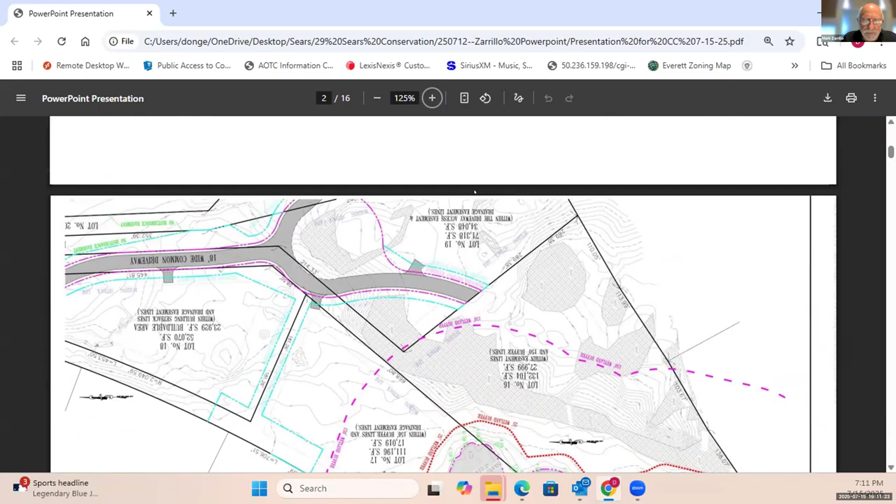You could switch the slide, please. Okay, lift it up a little bit, Don, to the top. I need to see the bottom of the slide. That's it. Okay, so I changed the orientation so I could show you the entirety of the wetland area on the backside of the property. This flipped 180 degrees. Sears Road is to the upper left of the screen, and our property is outlined by this large rectangle, down at the center of the screen going to the bottom. The wetland is outlined by a purple line, which was created for the ANR of the original development. This is not what EcoTec has done, because they have done another more recent wetland delineation based on the new survey.

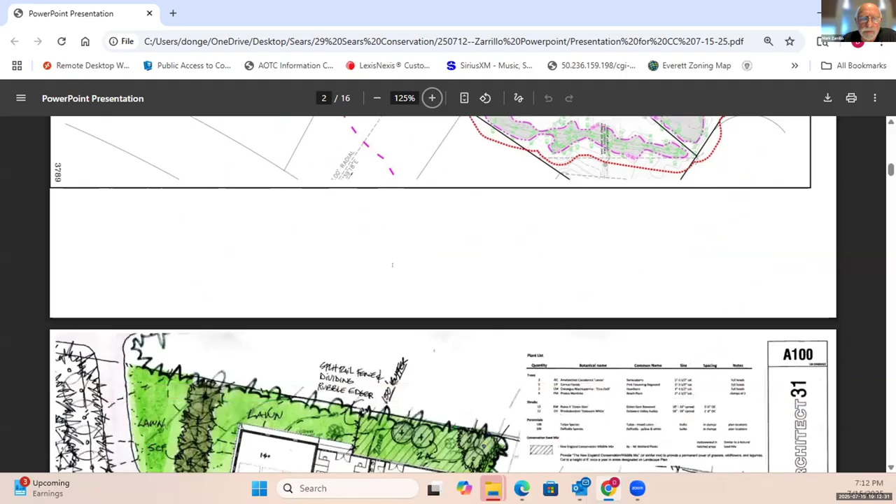So this is the property, originally called Lot 17. You could change the... so originally on Lot 17, the proposal that was presented in 2023 — if you notice, Lot 17 has 111,000 some odd square feet of area, which is an incredible amount, allowing for an incredible amount of FAR. So the original plan was to build a house with a swimming pool and a sports court, essentially to satisfy the family already living at 21 Sears Road who thought they needed a larger house.

Next slide, please. So during discussion of this larger house and what it would wind up looking like, the question arose: what can we do to add on to 21 Sears Road, the property immediately to the left of this site? The answer was there's not enough FAR left for number 21 Sears Road. So what we did was borrow some FAR from Lot 17, which you see here, and reduced the house and the size of the development there to include a house smaller than the original, but without a sports court and without a pool.

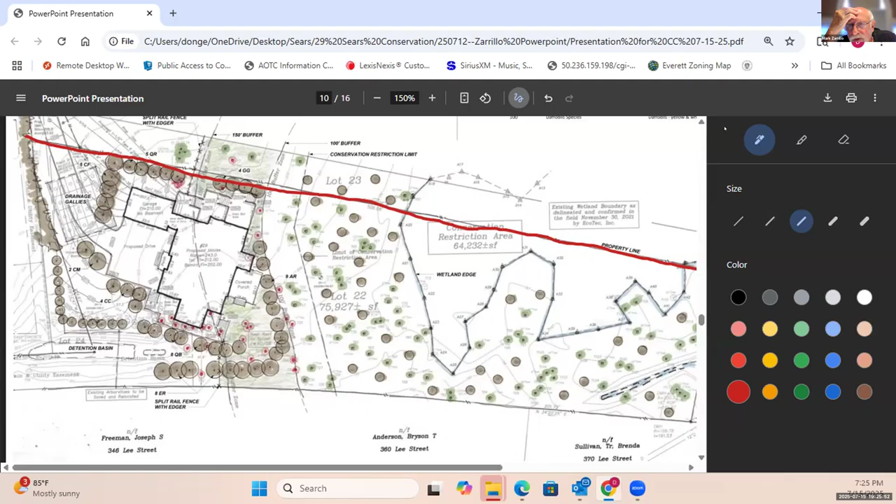But Don, if you would, for just a moment, take your cursor and outline the property line across the top and then down the middle for them. Yeah, so the property line now goes all the way down to, keep going if you can. This is a little tricky, but I'm doing my best. Yeah, well you're doing better than me. I couldn't get it to work. Right there. Yeah, and then you got some sort of table showing there on the corner. Can you get rid of that? That's me drawing. Oh, that's you drawing? Okay, testing my computer skills. Okay, what I really want to show is the end line. Yeah, yeah, there you go. That the end line right down there.

So these 35 trees are confined in lot 23, which is the old lot 17, as described by Don. But as Don had mentioned previously, we had suggested that the conservation restriction area would be the whole backside of this lot. Since the client owns both lots, he would certainly like to go ahead with having the whole area, which was originally a whole piece, put in the conservation restriction, including the lower portion, which is the new lot 22, and the other lot as well, connected to number 21.

Don, could you go to the next slide, please?

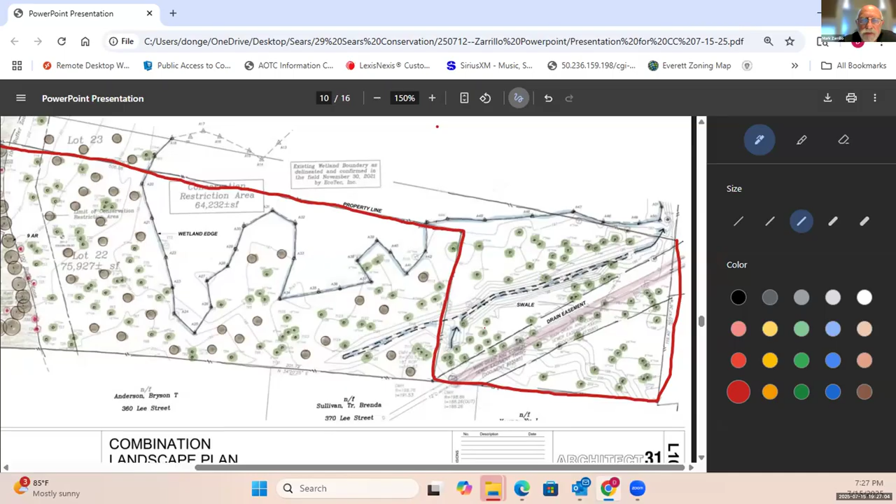Okay, so then you can get, there you go.

So this is the new plan that Vern put together that shows the conservation restriction line and also shows the designation and area of lot 75,000 square feet, which includes all of the backside of that property in the conservation restriction area.

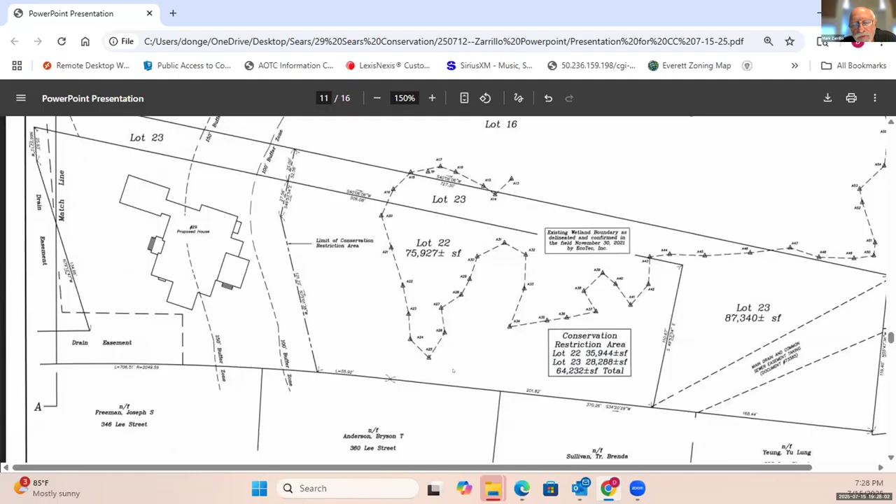Oh wait a minute, there's a box there. If you can read it, it says lot 22 is 35,944 and lot 23 is 28,288, for a total of 64,232 square feet, which would encompass all of the backside of that property. Great, okay, next slide please.

So this is - well, you can make it a little bit bigger - this is a larger area to show you the difference in the colors, the distribution of the trees, the organization of what the edge of the wetland looks like, and also what is going on the site.

Could you roll that up so we see the bottom of that plan? That's yeah, yes, okay, right.

So we've had a lot of comments by abutters, and one of the things we could address is that 360 and 370 Lee Street - they're really concerned about drainage, and rightly so, because their properties are in the 100-foot buffer. Mostly all their property is in the 100-foot buffer. So their property drains out onto our property, which is not supposed to happen, and it goes out that swale on the right side, and I'll show you the continuation of that, but that swale goes out to Dale Street and continues on and basically goes into, I think, the pond over there at Larz Anderson, as an intermediate area.

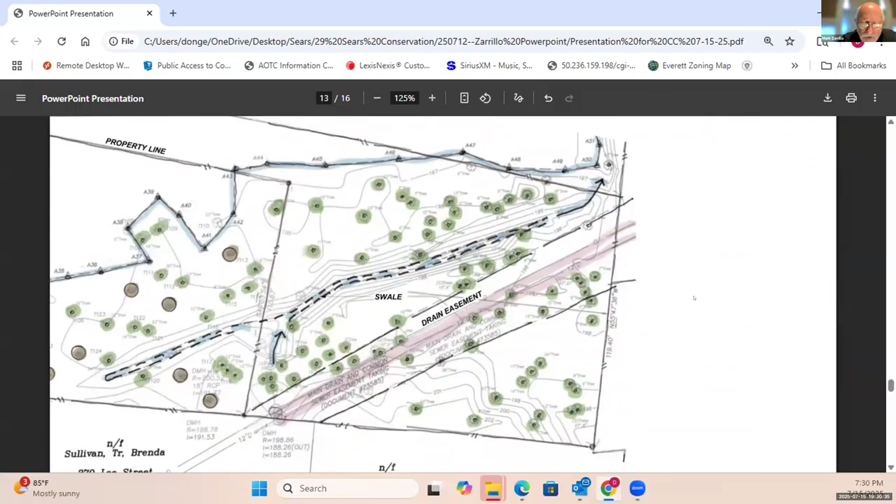Let's look at the next slide please. Okay, so there was real concern about that back parcel, and why this was done and how it was done. As I mentioned before, the real reason was to add square footage to number 21.

So you can see here that there's a swale that continues down and right out to Dale Street, which is on the right-hand side. And also there's a drain easement by the town, both for sanitary sewer and stormwater sewer.

So the fact is that there's really no way that you could develop this back parcel because of the easement, because of the drains in place, and because the town wants to maintain that open drainage from the abutters at 360 and 370 into that swale and out, so that they don't have to put an interceptor in there to deal with that. So essentially, this is undevelopable, and I hope you can realize by looking at it that that's the case.

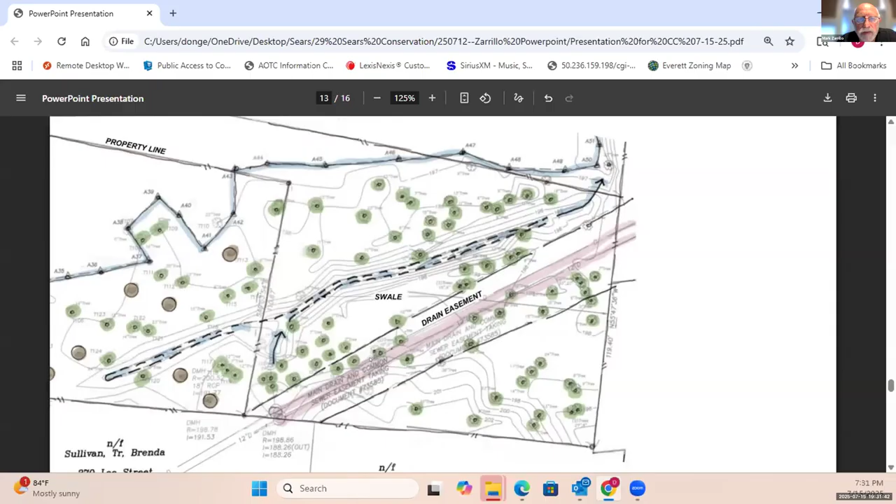Next slide please. Okay, so this is the total package. We've already sort of touched on drainage a little bit, but if we go back to the original site for number 29...

You can see that under the driveway are the drainage galleys for the property, which have been organized by a civil engineer for all the drainage that comes off the roof, all the drainage that comes off the paved area in front, and essentially goes into those galleys.

And then if you look down at the bottom of the screen on the left-hand side, you can see a drainage basin. That detention basin is the detention area that was originally organized.

And I believe that when you folks approved - I think it was number 25 - for construction, one of the conditions was to clean out the drainage on this site, all the catch basins, all of the swales, make sure that the drainage worked, and so forth. And that was done, I think, 2 years ago. Vern can attest to when that was done.

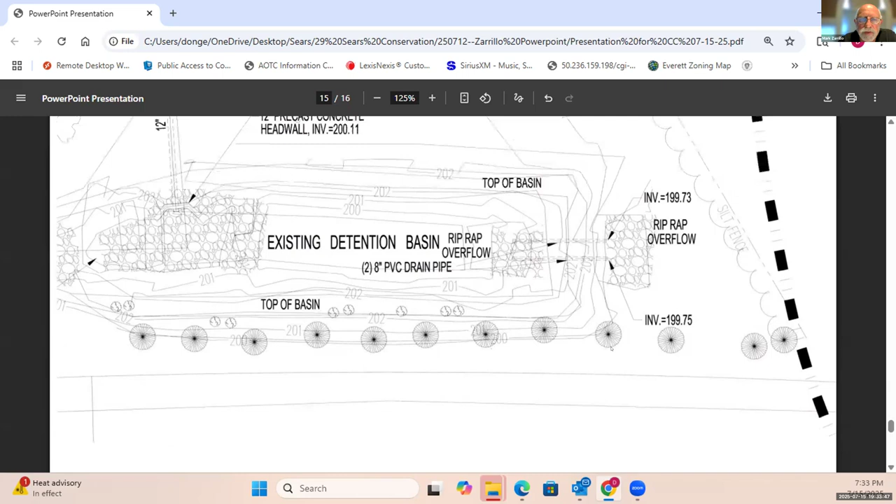Okay, so I think we covered everything that you were looking for, at least initially. Number one, why the subdivision occurred, how the subdivision occurred, what the subdivision was for, and how it affects the property that is up for approval now. We looked at the rear part of the lot to understand why that can't be developed, and what the real reasons were, which was to just add FAR capacity to 29 Sears Road.

We looked at the planting and the mitigation that not only occurs on site and in the 150-foot buffer, but also in the 100-foot buffer, and for the most part across the entire property, which would be in conservation restriction. And then lastly, looked at the drainage to ensure that we are basically containing our drainage and organizing our own work there. So that's about it, and I hope that the context gave you a little more insight as to what type of work has been going on and how it can be fruitful in the future for everything, including the wetland. Thank you.

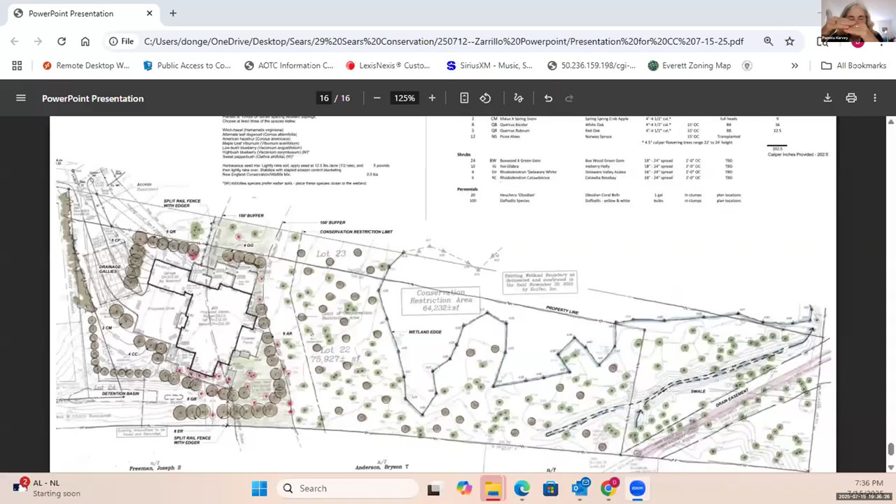I wondered if you could just go back through the slides, maybe a dozen slides back, just to be sure I'm clear in my own mind where it went from the project that was approved in 2023, and then the new work going forward. Was the swimming pool part of the 2023 plan? Yes, it was.

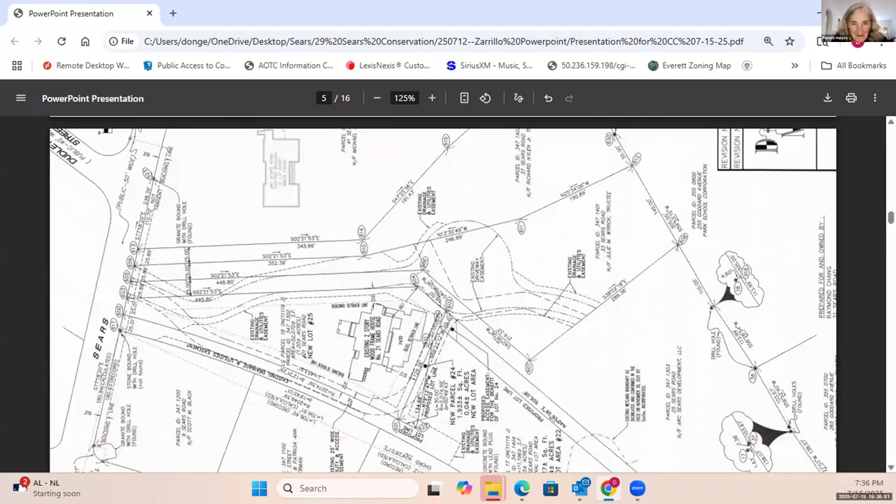So why don't you go back? So this is, yes, okay, so this is the one. Why don't you flip back one more? I think you're going forward. Oh, I'm sorry, is this the one you were looking for? Yes. Okay, so this is the 2023 one where it shows the swimming pool and everything. Yes, and it was all undercover, correct? It was all structured, yeah.

Okay, so for purposes of the amendment, it's just important to know what it is we're amending. So this was the project plan in the original order of conditions, showing the additional swimming pool area, the bump out there, and okay, and then move down one to the one we're looking at now, where the house was reconfigured. Right, and you can also see the New England wildlife mix zone indicated by a hatch in the darker green area, and the fence and so forth, so that's repeated in the new plan.

Okay, so why don't you just go forward one and we can look at the next. Yeah, so you can see here, it does knock off quite a bit of the footprint of the building.

Okay, Roberta, what were you gonna ask? Roberta, you're next. I think you're right to acknowledge that this is somewhat confusing, and for us this will be the first time we're looking at a situation that involves the tree protection bylaw and part of the buffer zone. And I guess I would just note at the outset that we are interested in the input from that process, but we do have our own standards that we're required to meet.

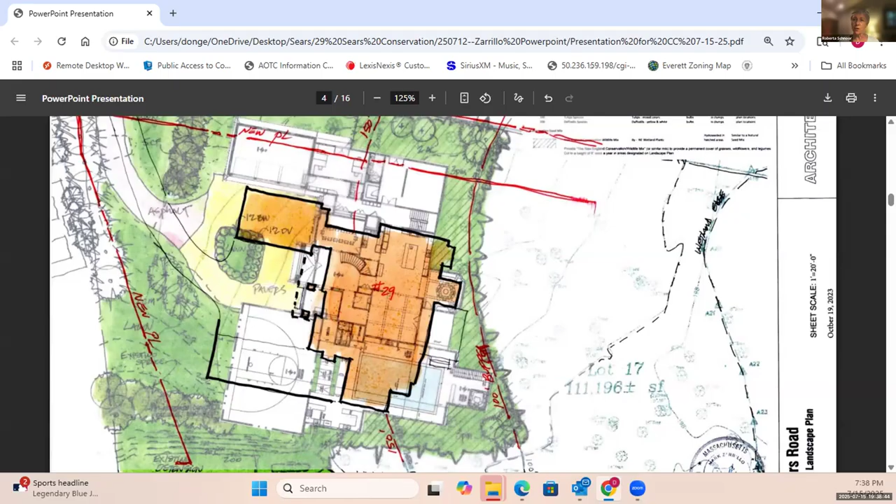And I'm curious, first of all, as to whether you've been through the permit process for the tree protection bylaw. I have, yes. And so has this plan been through it? No, this particular plan, the application has been made, and we're perfecting it as we speak. It's under review, I've received comments back. Comments were, at least up until now, not substantial in the sense that we need to change anything. One of the things we found is that there's sort of a glitch in the actual application process, because once you submit the information, you can't update it. So you have to put additional information in and indicate that it's been revised. I think that's going to work its way out soon.

And I think that in the beginning I didn't think it would work, because the balance I thought would have been off. But when you get the arborist involved and you figure out what trees are dead and what trees are unviable and that sort of thing, and then you subtract that, and then finally you come up with a number.

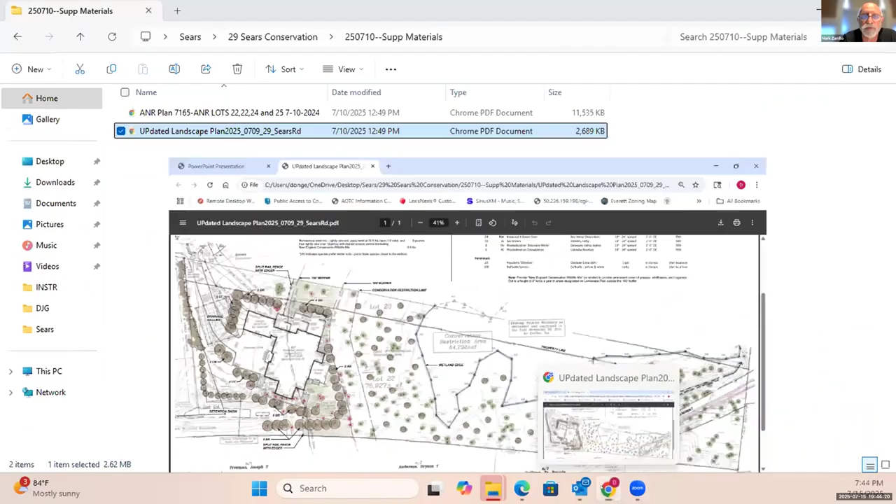Can we go back to the slide before this, please, about what you just said about removing things, particularly if they're in the buffer that look like that. Go back to the slide before. Can you go back to the slide before? Yeah, I'm working on it. Okay, keep going. Oh, I'm sorry, maybe it was forward. I'm sorry, it's the one with the red dots on it. Yeah, that one, that one. Okay.

So the trees that are down at the bottom, all along the edge there, those are actually, most of them are small caliper trees. The ones that are out in the open, there's 1, 2, 3, 4, 5 trees at the very bottom. Those are actually dead because there's too much water in that area. So what we're doing is, we're taking out 3 trees along the edge of the buffer, because those trees just are not in good shape.

They're really unviable. And then we are planting 9 trees that are natives along the edge of that buffer, plus the saplings that are going inside, much better condition eventually than it is right now.

You know, there's really just one tree that actually is a tree that you would consider to have shape to it, and that's the tree at the very top, which is actually on the adjacent property, so it's not even on our property.

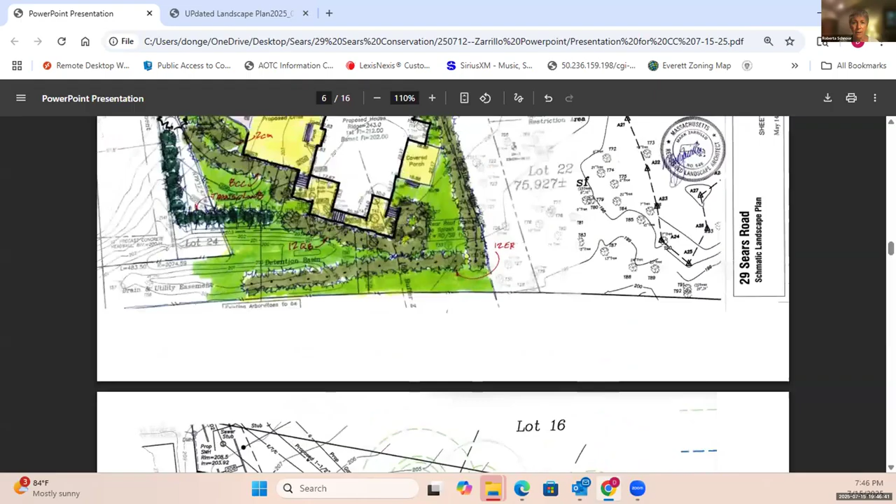So just generally, if you could go forward so that we can see the landscape that you're proposing, just on that map. Sorry, is it up one slide? Yeah, it's up. Up, let's see. Up. Yikes, you got to go up. I'm sorry, you got to go down in order to see it.

Yeah, I think that final landscape, the comprehensive landscape plan is what we're looking for. Okay, but go back to that chart for just a second, if you would.

If you look at this chart, this is the chart that was prepared by the arborist, and you can see that the condition of those trees are all poor. All the trees that are off-site, which are the first 9 trees on the right-hand side, off-site, last column, those trees are remaining. And then a little further down, there's a number of trees in the buffer, and if you look over, they're all remaining. So we are keeping all the trees we possibly can that are not invasive or unviable.

Except for those trees that we need to take down because you need to do that in order to build a house. I see there are lots of questions.

I just want to, if I could, focus on the landscape map, the complete map, and maybe other people will have questions there too, if we could get that up in front of us. Yeah, sure, so this is the final landscape plan.

Okay, so let me zoom in a little bit. So I just want to understand, because I know you have changed the shape of the house, and I see it looks like 2 staircases. I'm looking at the area within the 100 to 150-foot buffer zone that is outside the house now and to the west.

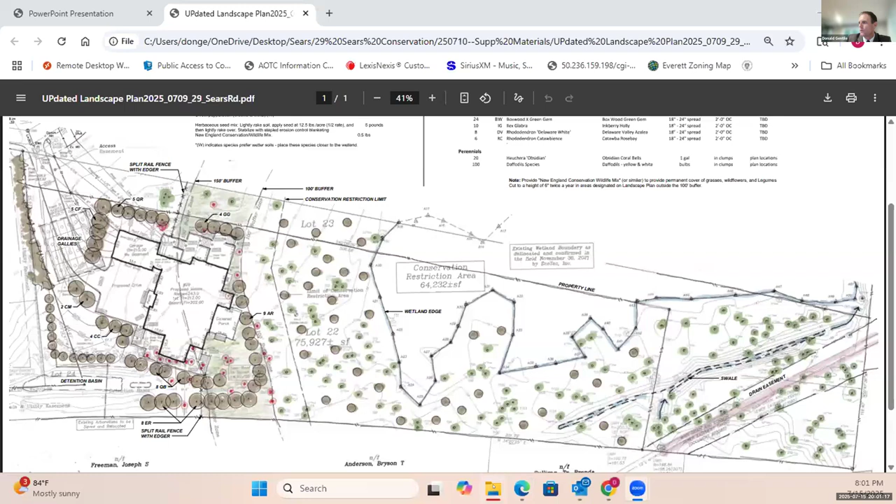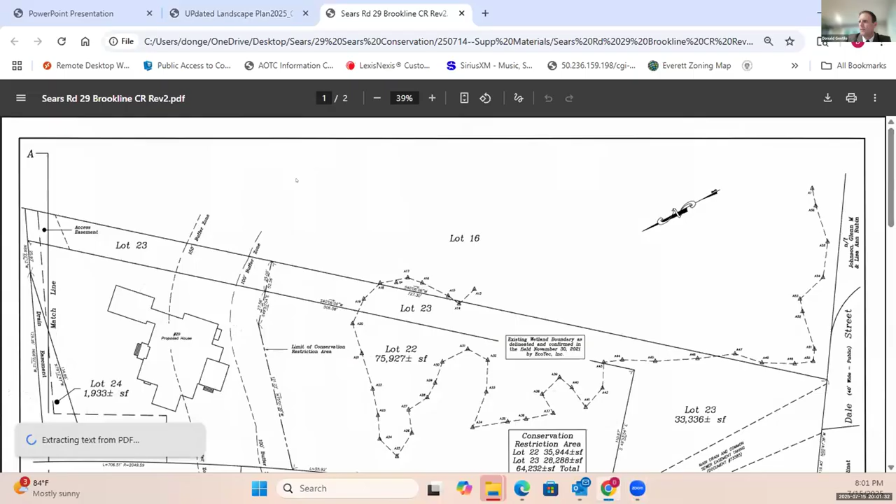I did not catch that difference, but I can certainly show you the latest conservation restriction slide. I believe the one in the presentation was one we had received previously, but then I received an updated one, and I just wanted to make sure that was the one of record. The presentation had lot 23 at 85,000 square feet or something like that, so I want to confirm this is the one of record. Yes, that's the one that's in the record online, the one we're looking at right now.

That's what I have from my end, and from an operational DPW point of view, this tricky business of the 100 to 150 foot zone, where everyone has jurisdiction, requires a lot of oversight. Looking at it from both the Conservation Commission point of view and the DPW tree preservation point of view, there are a lot of vectors and elements, and trying to find something that upholds the values of everyone and the onus of the various departments and commissions is a tricky business. It's something we're working on moving forward, and I appreciate the flexibility of the commission in reviewing this, and the applicant in addressing these new changes.

I would just say, Mr. Gentile, I really appreciate the organization and work that went into addressing the comments from last time. The systematic update was very helpful. Oh, thank you. I'll give a lot of that credit to Mr. Zarrillo, who came forward with the presentation.

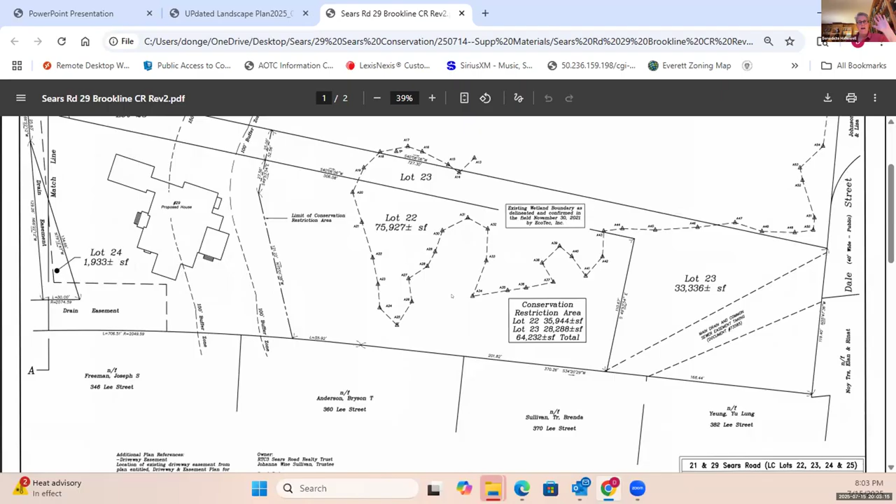Hi, thank you for your time. Benedicta Howell, town meeting member, longtime resident and neighbor. I've known three generations of that property, as I mentioned last time. Thank you all for being very organized and getting into the meat of the matter. I've been coming to all the meetings, and there are a lot of us on tonight, not always there, but we're all following this closely because we do care about this property.

While I make my comments, does anybody have a real live picture of the site? I ask because I think it would be great to look at the site for everybody to see what it really looks like. We're all talking about this and looking at plans, and I thought what a shame that one doesn't really see what it looks like. So my questions are...

I'm glad that you are following the tree plan, the new tree planting plan, and the new tree law, and focusing on that. The word 'unviable' - we're all enjoying thinking about that. In case you haven't looked it up: not capable of working successfully, not feasible. I have walked this property, and these trees don't feel like they're in a poor situation. It is a very natural, very beautiful area that was not able to be developed in the past because of the vernal pools. And now here we are with a development of five very large houses, larger than any of the houses in the neighborhood, which already has large houses.

That's why a real photo might help you all. If you were to see a real photo, respectfully, this neighborhood looks very different from the neighborhood next to it and everything else in Brookline. It does have super manicured lawns, very structured metal fences, and a lot of signage up - a lot of Cindy Stumpo signage - and it looks like a very serious development in another neighborhood in another state. So it doesn't look like that. When people were concerned about whether the back would just be mowed and look different and the ecosystem would change - it already has changed a lot.

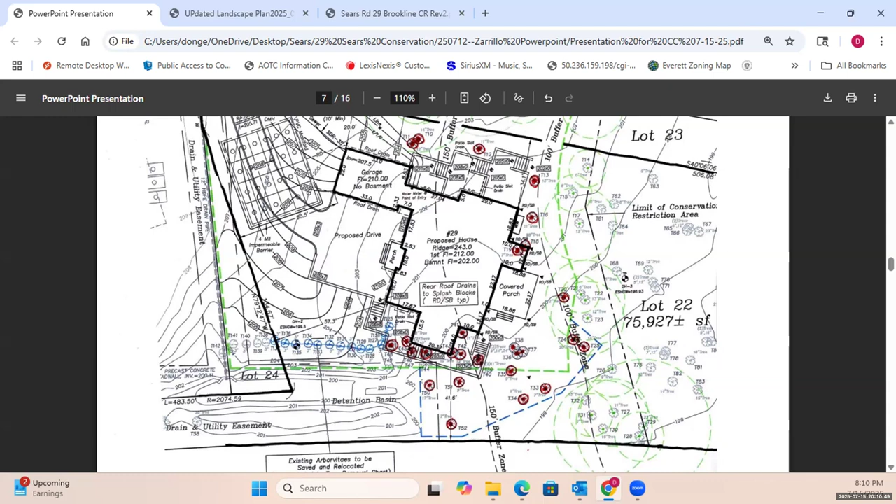So I take issue with what Mr. McManus said, that the maples that are viable here are set to be maintained. Bryson, I know you commented on this at our last meeting as well. Paul, response?

To answer Mr. Anderson's question, what I was referring to is the back area where we're proposing invasives management. We propose to pull out garlic mustard and other invasives, just one example. But in that invasives management area, we do not propose to cut down the Norway maples. I was speaking specifically to that issue, because Mark had mentioned it in passing, but it's a substantial amount of additional planting. My comment related to the invasives management area, which is outside the project footprint.

Okay, tree 38 is not in the buffer. I think last time as well we talked specifically about these trees, and I hear you, Bryson, around those being removed. I think they're proposing to remove them, is my understanding. Those larger trees we had identified sit within the envelope of the proposed house, if I remember correctly. Are those the ones you're thinking about?

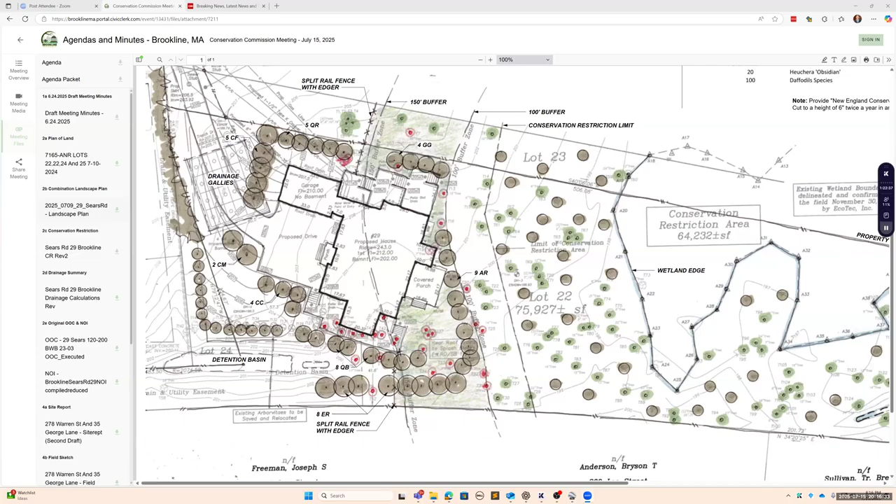Richard Nangle, sorry, I'm gonna botch everybody's name by the end of the evening. Hi there, Richard Nangle, Town Meeting Member Precinct 15. I want to support Benedicta's comments.

It's always interesting to see that a Stumpo property never has viable trees. This developer is a serial violator when it comes to lighting, trees, blasting, whatever it is, they're going to violate it. I think this needs to go back to the drawing board. That entire area, 20 of Sears Road, has non-conforming light, and it's very upsetting to the people who live around there. There's talk in town hall of sanctions for this developer, and that's a good thing. I appreciate the work this board does, but this project is a non-starter.

Thank you, Richard, we appreciate your input. Are there any other comments? I was going to ask if there's other public comment—yes, Sylvia, you have your hand up.

Hi, this is Sylvia Westfall and Christoph Westfall. We're abutters at 41 Sears Road. We want to second Richard's sentiments as well as Benedicta's about ensuring that any of these plans for planting, is there a mechanism to ensure that they are followed through?

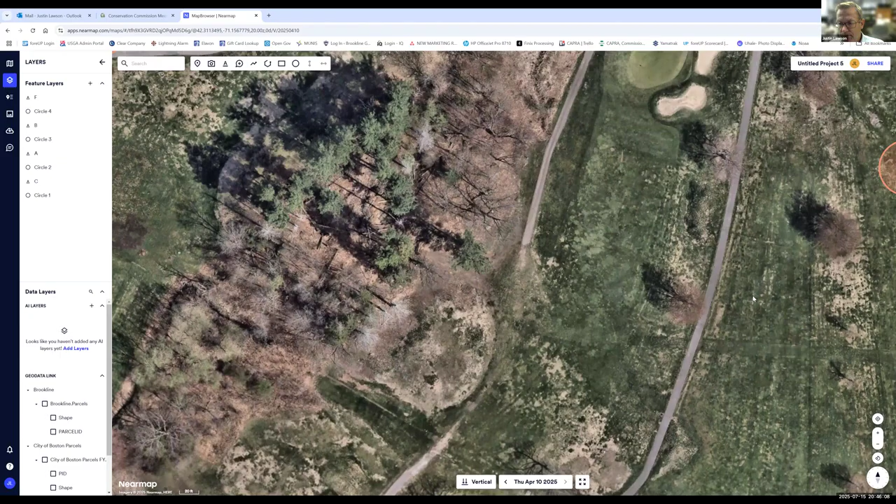Okay, F is an existing culvert that is in the ground. It is not currently daylighted, but our plans are to daylight this culvert, and we're going to be shifting the cart path to the left side of the hole and will need a crossing there. So we do anticipate these being temporary in nature.

Let me go ahead and stop sharing and kick it over to Mark and Mike if you guys want to add some additional context, and we've got some other documents that we can share. Mike or Mark? Good, Mark. You're muted.

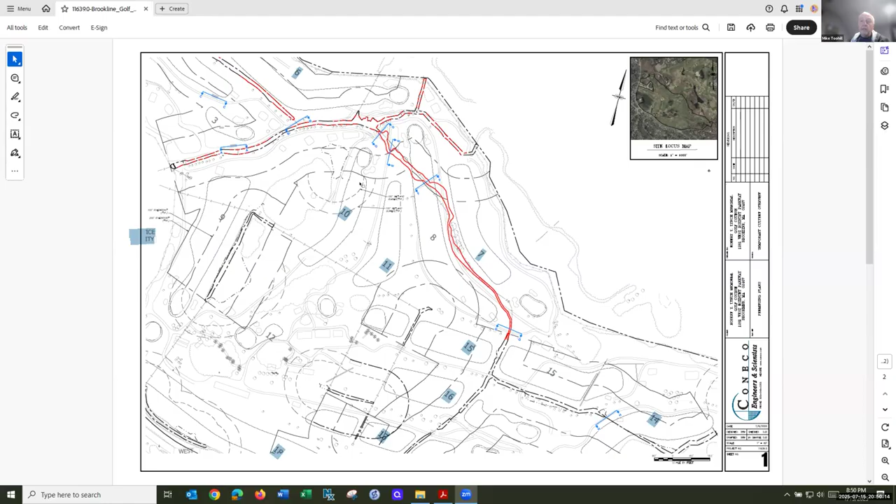What we wound up doing is taking a look at what we proposed for the channel, and I'll go down to the cross sections. We took the channel we proposed, because we want to build the channel—that's the whole purpose of the bid this summer, so we can get out there this fall, especially on the main channel and the daylighting. So if we build the channels, we want to put pipe into the newly built channels, and we have to play between the width of the bottom of the channel and the height of the channel, keeping a foot of cover on the pipe.

That's why we wound up with various pipe configurations in the different cross sections, playing between depth and width. Sometimes we had to use a bunch of little pipes, sometimes a couple of bigger pipes, or three bigger pipes. This is all temporary, but the idea is to provide as much open orifice flow in those channels as possible, to keep the water moving, and make sure the pipes are at the invert of the channel so we don't wind up with what's called hanging culverts in the Rivers Act, where something backs up before the culvert and hangs on the end. So we put it down in the invert of the channel. That's what all these different cross sections represent.

Great, I think that's a pretty clear description of what you guys are interested in. Questions from the commission? To me it seems pretty straightforward—it's construction means and methods, and it appears you've been pretty thoughtful.

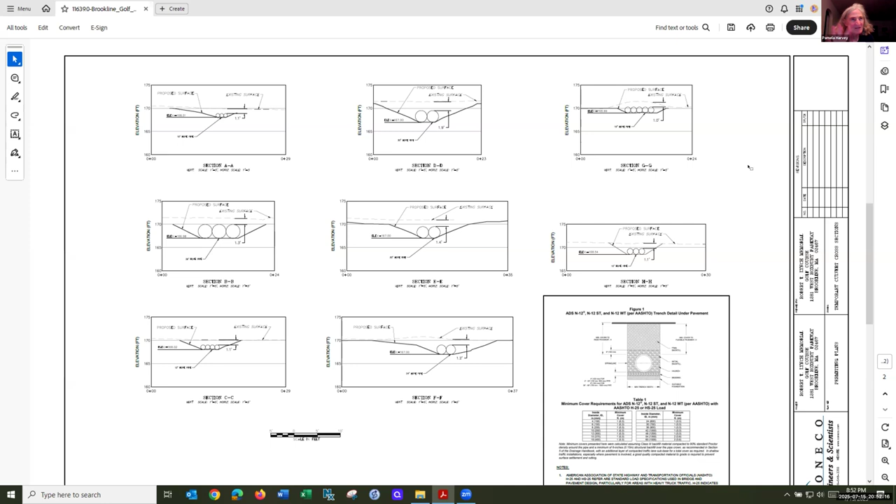Sorry about that, I think everybody's getting tired, myself included. So I'm just trying to understand procedurally where we are. It all makes sense to do this as a temporary thing, but...

I'm trying to think whether or not we would add this in. We're in amended order land again. No, I think this is a temporary step, and per the order of conditions, there's already a built-in bridge review down the way.

That was, I can't remember, one of the special conditions was that they would come back and reassess a bridge condition. So I think it would be appropriate that we could just vote at a commission level to approve the temporary change. That sounds like a good way to go, because as I recall, I believe the regional office had some questions about this project.

So I think it's probably, handling it properly procedurally would behoove us all. So I think that makes sense. I don't think it would really make sense to amend the order, so I think that would be a good way to go. So we would just write up that there was this request, it came in, and we were approving it. Basically this vote would reflect that, and it would go into the record, and we'd address it again when we talked about the bridges down the line.

And would the temporary culverts be sized in the same way as the permanent ones, or how would you handle that? Well, the permanents are going to be bridges, so the sizing is different, but it's just a sizing based upon the geometry of the channel where we can get as much area as we could, Pam.

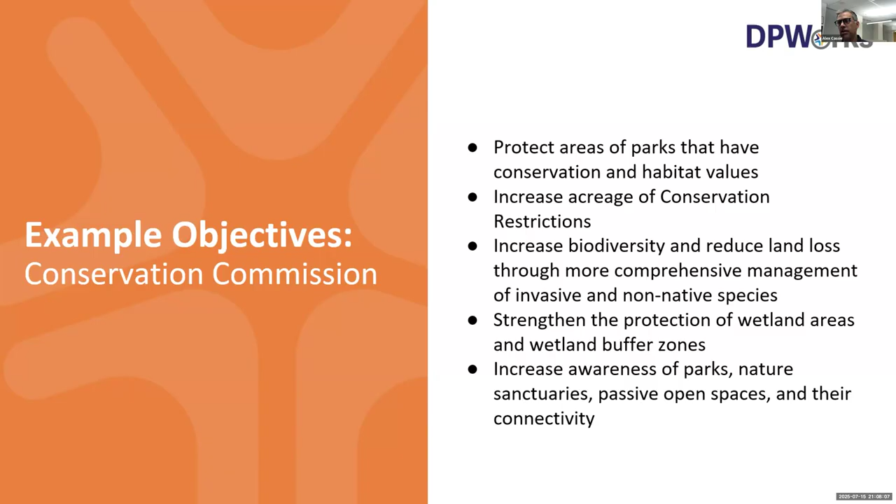To give you some ideas, this is what I've done in presentations to other boards: talk about specific objectives right under the umbrella of that board or commission. So when we look at the role the Conservation Commission is going to have moving forward in the open space plan, we talk about protecting parks with habitat value, increasing acreage of conservation restriction, increasing biodiversity, strengthening wetland buffer zones, and increasing awareness of these passive open spaces and sanctuaries. These are all things I'm going to work toward with you folks over the next 10 years, which is what we're looking at with this open space plan.

This gives you an idea of what we've updated from 2018. A lot of this stuff is brand new. A lot of sections we basically completely started over. Some sections we were really lucky to have the keen eyes of most of the commissioners here tonight to help us update earlier sections and make sure they were clean and crisp and had all the information we need, and then to really shine up the nuts and bolts on everything else.

This gives you an idea of the visual upgrade we've done with the open space plan. There's a lot of information in the previous open space plan, and it was an award-winning plan — it was really something to hold up and say this has a lot of great information in it. We had the opportunity, I think, to put a little more shine on it and make it a little more user-facing and friendly.

A lot of this is Rebecca's work, and a lot of it is working with the designer, coming up with ways to present the information we had that were more engaging and really provided the information we wanted, not only for the user of the plan but also for us as staff to have it be as usable as possible. There was some information in the plan that was helpful if you had a very specific position somewhere in the Parks Department, but it wasn't super helpful to everyone else, and it wasn't required by the state. So we tried to make sure everything in here was either a base requirement or a vital import, really of use to our sustainability staff or our park staff.

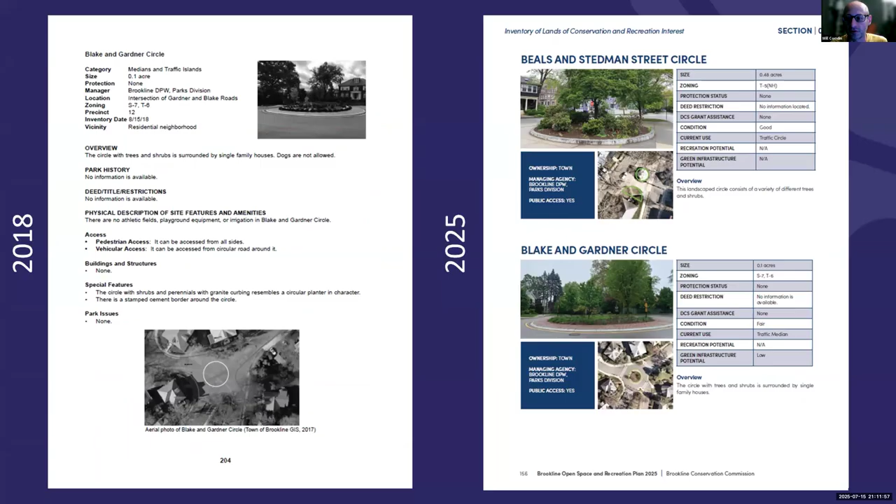To give you an idea of where we're at in this process, this summer is when I go around and shop this around to all the boards and commissions. I've presented this to the Park and Recreation Commission, to the planning board, I'm presenting it to you folks tonight, and eventually it will go before the select board either later this summer or early in the fall.

We've received feedback from the Division of Conservation Services. Some of that Rebecca and I are editing in now. We're still waiting on feedback from the Metropolitan Area Planning Council. These are letters that are required as part of the process. We want to make sure we're hitting our metrics there, but also to make sure we can include those letters of support in the final plan. Ideally, should this plan be passed by select board and we meet all the conditions approved by the state, we have conditional approval from the state. We would really start implementing it this fall, kicking off with a planning meeting at a staff level and start talking about what the next few years of implementing this plan looks like.

We shared the draft as part of this agenda packet. The draft's available to the public as well. We encourage you all, you really had a role in this, whether you were on the committee or not, so I encourage you all to look through it. We're pretty proud of what we put together. But I was curious if there are any questions from the commission regarding this plan and the update process in general.